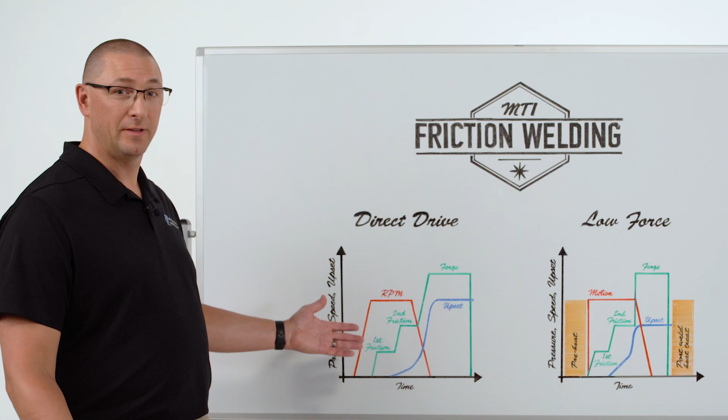Hydraulic cylinder rods are near and dear to MTI's heart because our very first friction welding experience was done with Caterpillar Tractor Company, who we bought the rights and the patents for the inertia welding process from. Piston rods have been done since the mid-1950s, 1960s, and the predominant technology is direct drive. And the reason for that is we need to be able to build in enough heat into the component to be able to control the cooling rate and avoid the formation of martensite.

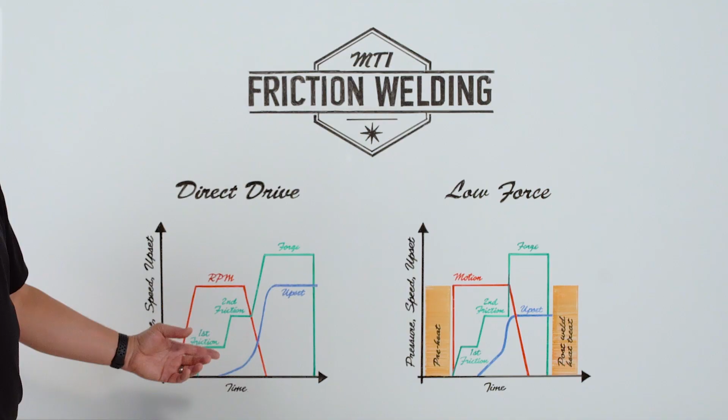So we do that in direct drive. We bring the eye or the clevis up to a rotating speed, the RPM. We bring on first friction pressure. This squares up the interface a little bit, reduces the coefficient of friction so that we can bring on greater load. The second friction phase is where we add the majority of the heat and we start upsetting the material.

This friction phase is shown as really short here in the diagram, but in the case of hydraulic cylinder rods, we extend this time and we get a lot of upset in this phase, again, to be able to build heat in the part so that it cools at an appropriate rate to avoid the formation of martensite. Once we get the desired amount of upset, we bring the rotating spindle down to 0 speed, we bring on the forge force, and the weld is complete.

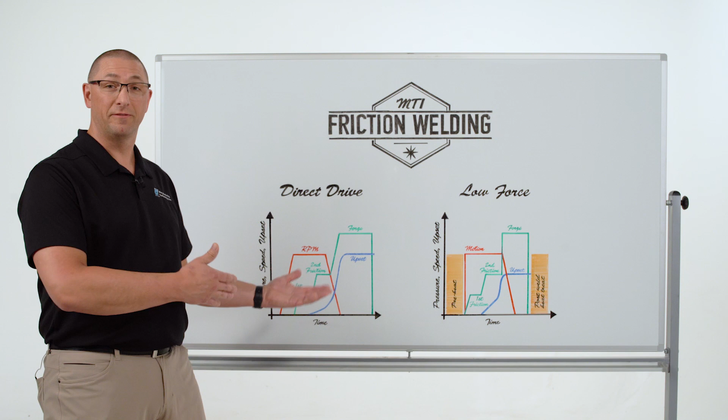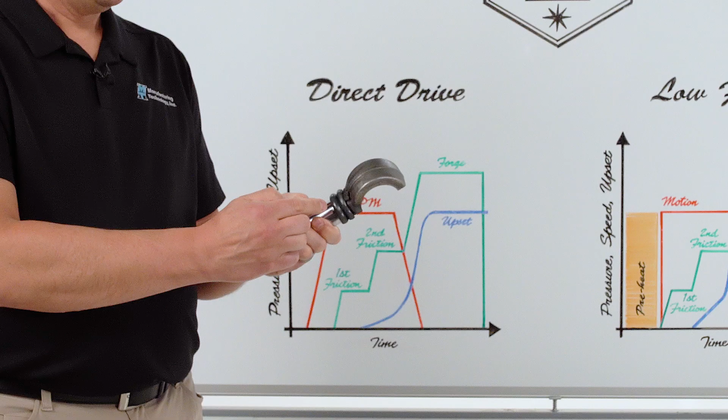But at that point, because of all the upset we created in second friction, we have to do a post-weld machining of the flash. And this two-axis machining is a very difficult process. So as you look at traditional hydraulic cylinder rod, the first thing that comes to your eye is this large amount of upset. So this flash formation has to be removed in a two-axis CNC style turning operation.

And it's difficult because sometimes you have some of these little stringers that are off to the side. You have to make sure that you don't create a ring that breaks free from the rest of the flash and will then possibly scratch the pre-chrome rod. And this is a tremendous amount of cycle time. Many times it's often as long as the welding process itself.

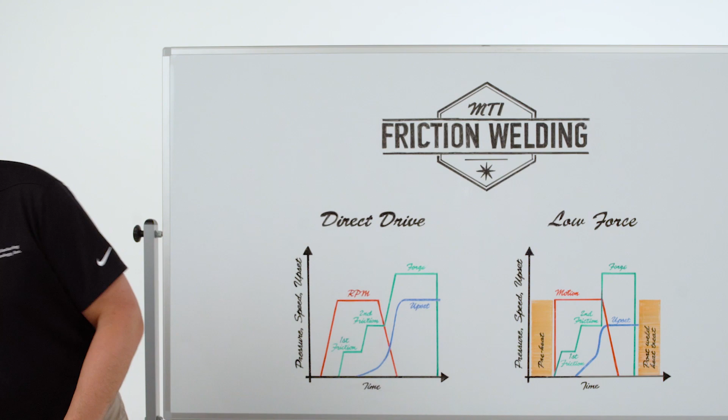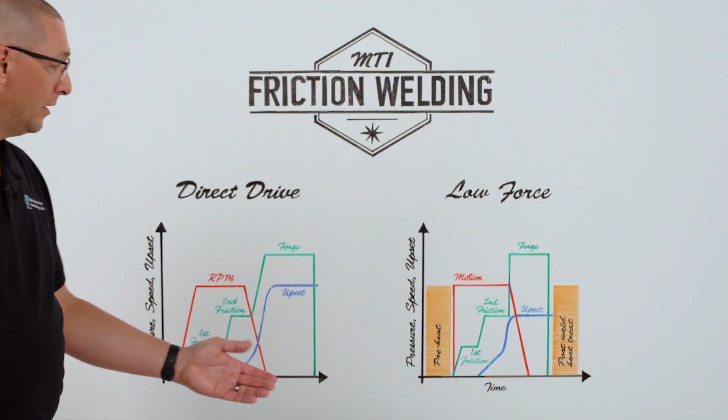If we look at the low force process, we have the ability to add preheat so we can get the heat soak into the part that we want without having to generate all that friction or all of the upset. We can make low upset welds with this because we're using the preheat to get the heat in. So we may go through a first friction phase, we may go through a second friction phase, or we could just bring on forge force from the beginning and just handle all of that heating with the preheat side.

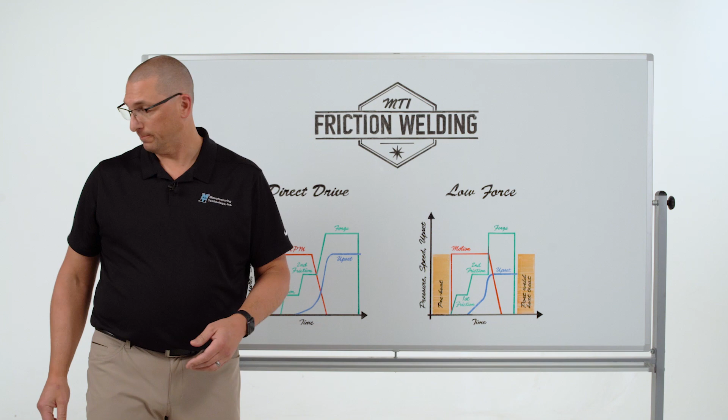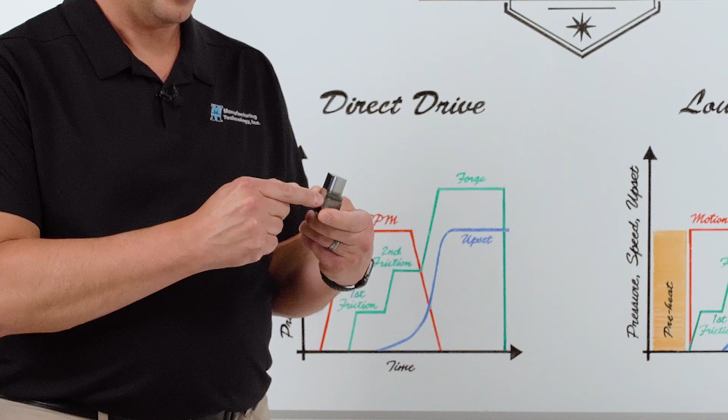So now our cycle times are much lower, but the biggest benefit is we may not create all that upset that then has to be turned off in this post-weld machining operation. Here's an example where we're welding a rod to an eye where the diameter of the eye at the weld interface is slightly larger. You can see this weld curl here is more of a bulge. So turning this off post-weld is much easier. We may not even have to turn it off because there's no stress riser here as a result of the flash morphology.

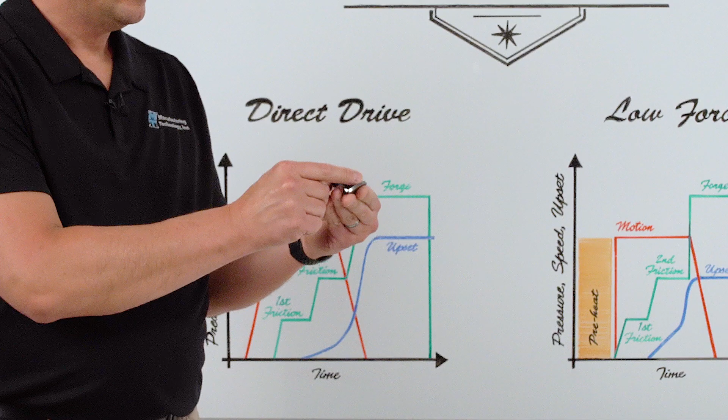Here's an example of a weld where the rod and the eye diameters at the weld interface are the same. Again, you can see this bulge at the weld interface instead of having that complicated curl. If I need to turn this off, I can do this with a single plunge cut instead of a two-axis move. So not only is my welding cycle time faster, but my flash removal, if necessary, is also faster.

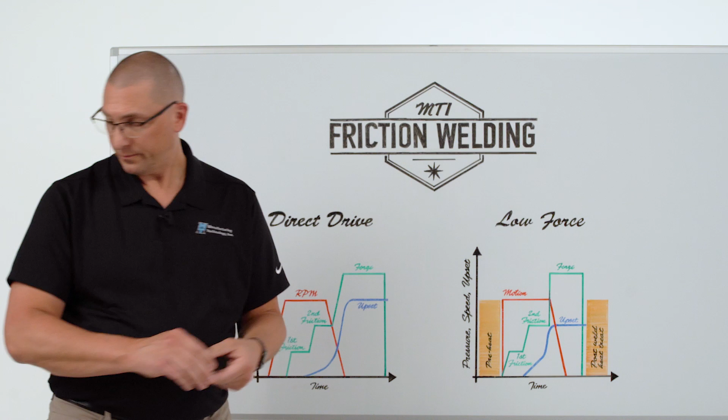So as a result of the low force process, we're creating less upset, which means our cycle time is going to be faster. The overall equipment throughput is going to be better. So you may want to look at the entire manufacturing process. How do the incoming parts come to the machine? What happens when you're making low upset welds? What do you have to do with the parts right after?

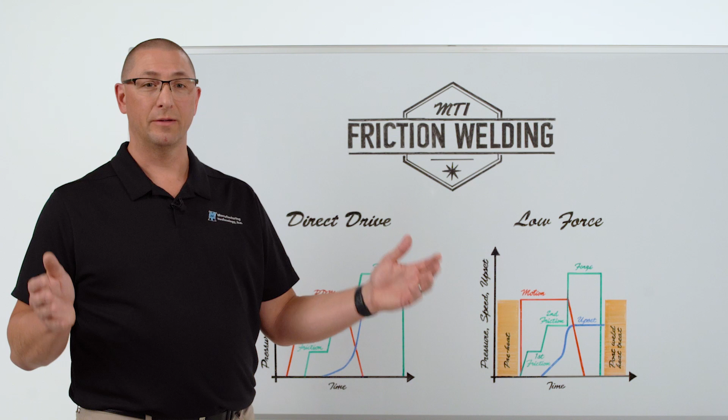We have tighter tolerances in low force than we do in direct drive. So I'm much closer to finished components and might be able to go right into the assembly phase without having to do any flash removal or machining of the components. So we encourage customers to look at the entire manufacturing process when considering low force, as opposed to just trying to replace one piece of equipment with another piece of equipment.

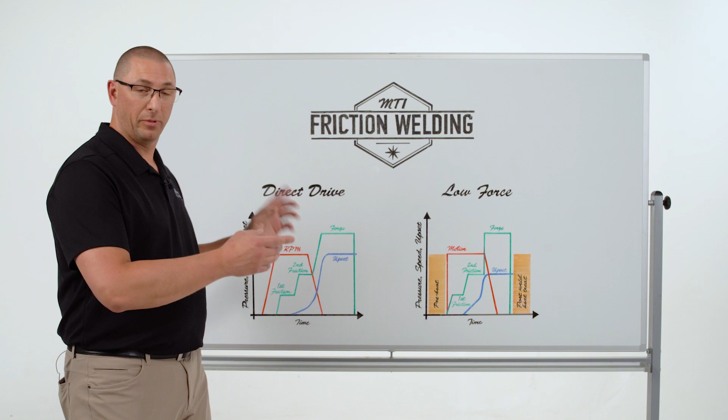We can walk you through this entire process by doing some weld development with you so you can see what happens when we weld your components. And we can walk this all the way through the design and build of a piece of equipment so that you're in a position to gain all of the values associated with low force, not just replacing the equipment that you may be used to with respect to direct drive.